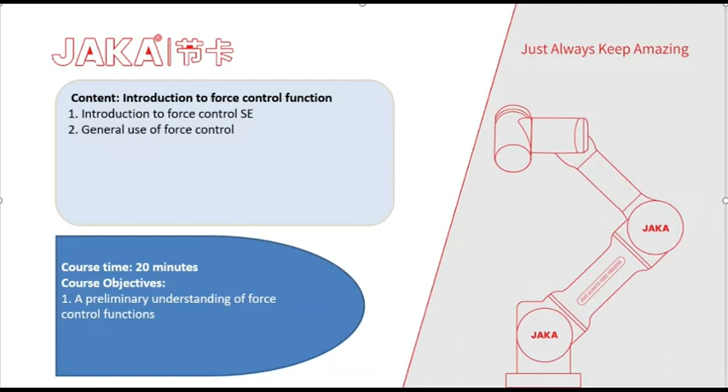This product is designed to use industrial-grade force sensors and integrates a force control algorithm with independent intellectual property rights, to improve the perception of collaborative robots and provide customers with a better human-computer interaction experience.

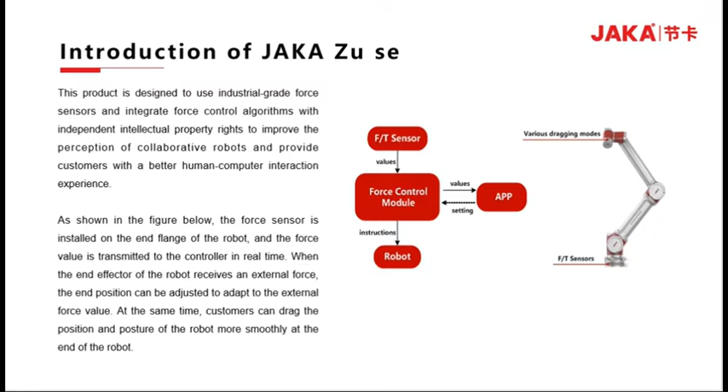As shown in the figure below, install the force sensor on the end flange of the robot and transmit the force value to the controller in real time. When the end effector of the machine receives an external force, the position of the end can be adjusted to adapt to the external force value. At the same time, the customer can drag the position and posture of the robot more compliantly at the end of the robot.

The JAKA Zu se System includes the APP, robot, control cabinet, and force sensor equipment. The force sensor at the end flange of the robot is realized through the operation of the mechanical connection software at the end sensor module in the JAKA app.

First, design the connection key between the force sensor and the end flange according to actual needs. By connecting the key or setting the tool coordinate system, ensure that the X plus direction of the sensor is consistent with the X plus direction of the robot end flange.

Then, the force sensor can be powered by the robot control or by the user's additional 24-volt DC power supply. Depending on the communication method, the sensor can be connected to the USB interface of the control cabinet for serial communication, or through the network port for TCP/IP communication.

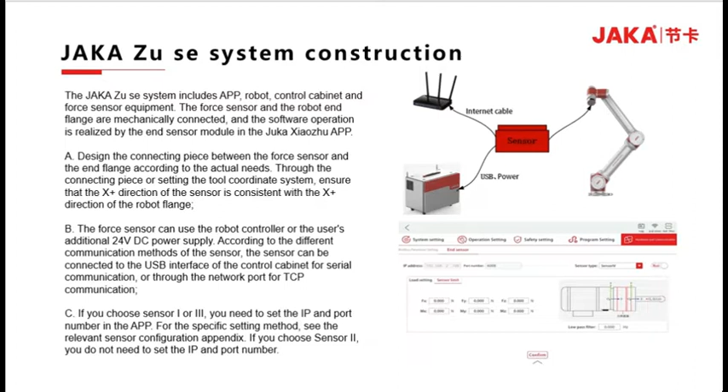If you choose sensor 1 or 3, you need to set the IP and port number in the app. For the specific setting method, enter the relevant sensor configuration appendix. If sensor 2 is selected, IP and port number settings are not required.

Force control automatic load identification function. When using a force control related function, you first need to set accurate load parameters. You can select manual input in the load setting, or you can use the automatic identification function. The process is as follows.

Set the starting position: enter the manual interface and move the robot to a suitable position, then click OK to exit. Set the end position when entering the manual interface. Only the 4th, 5th, and 6th joints are allowed to move, and the range of movement is within plus or minus 90 degrees of the initial position.

In the case of ensuring that the robot movement does not interfere, the larger the movement range, the more accurate the identification result will be. Click OK to exit the pilot operation, long press to set the starting position, return to the initial position, and long press the pilot operation to confirm that there is no interference in the identification trajectory.

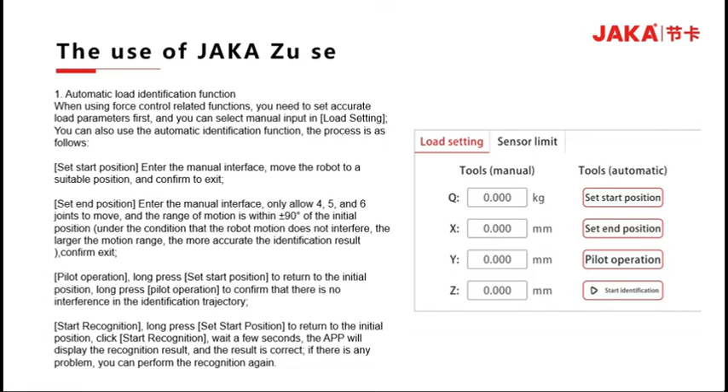To start identification, long press to set the starting position and return to the initial position. Click Start Recognition and wait a few seconds. The app will display the identification result. Confirm that the result is correct, or re-identify if needed.

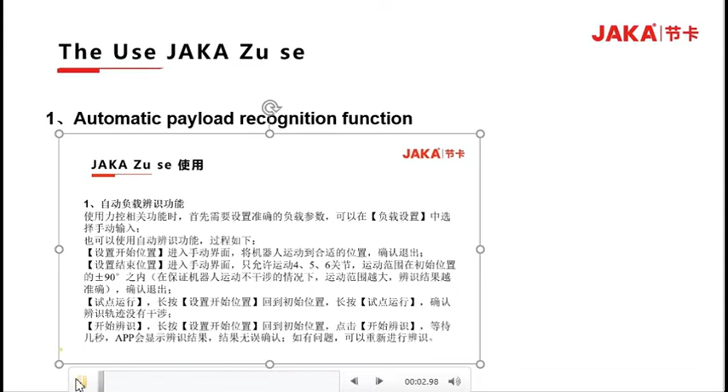Let's take a look at the video of using the automatic load identification function. Use the force sensor in the interface of setting the hardware communication and sensor. Here, use sensor 2 to set the start position.

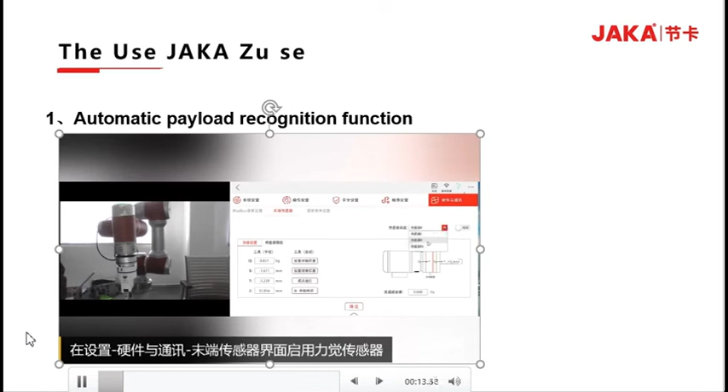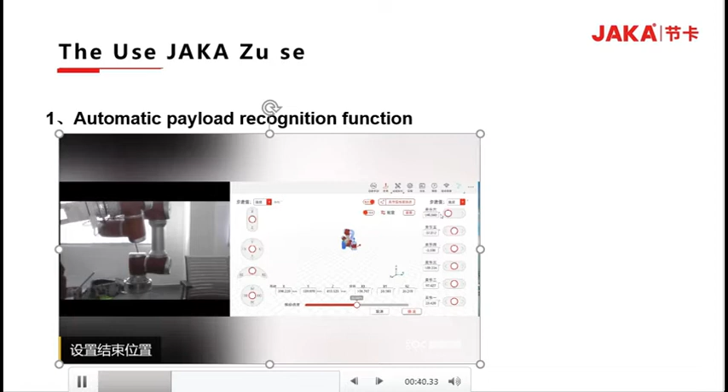At the end position, the rotation angle of joints 4, 5, and 6 must be within 90 degrees. Then long press the starting position to move the robot to the starting position. Then long press to run and check for interference, then long press to set the starting position and move the robot to the initial position.

Then you can click Start to recognize, and the robot will automatically move from the start position to the end position. After the movement is complete, the current load will be automatically identified.

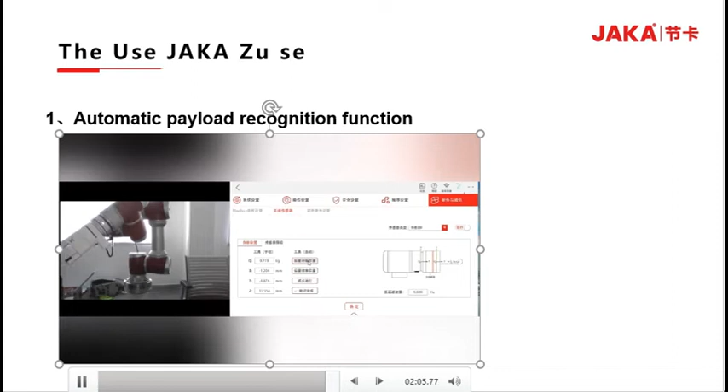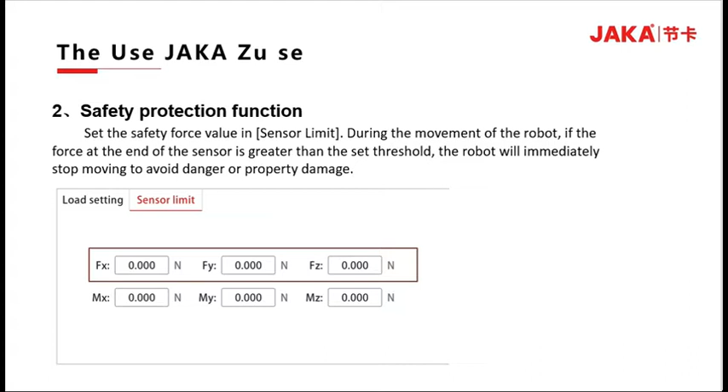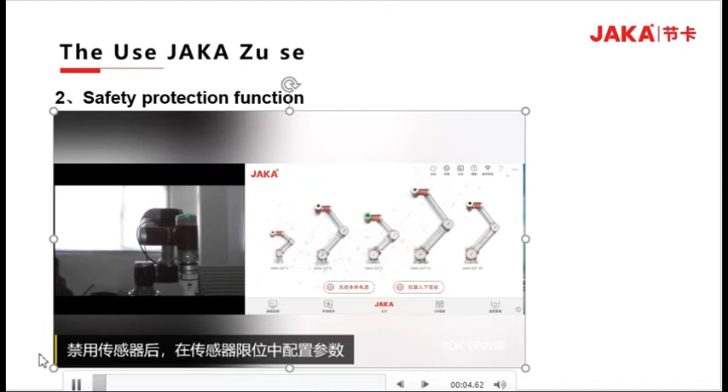Let's have a look at the safety protection function of the force control. After disabling the sensor, configure the parameters in the sensor limit. Enable the sensor and start dragging on the teaching interface. When the detected force exceeds the limit, the display shows a detected collision and automatically exits drag mode.

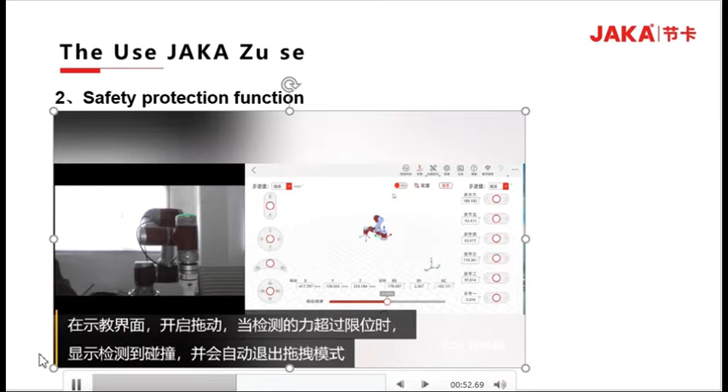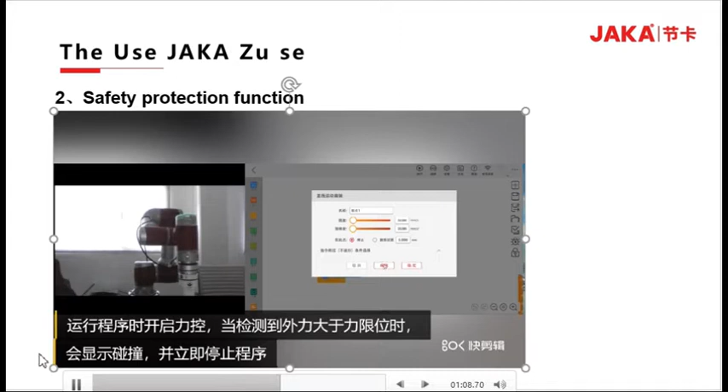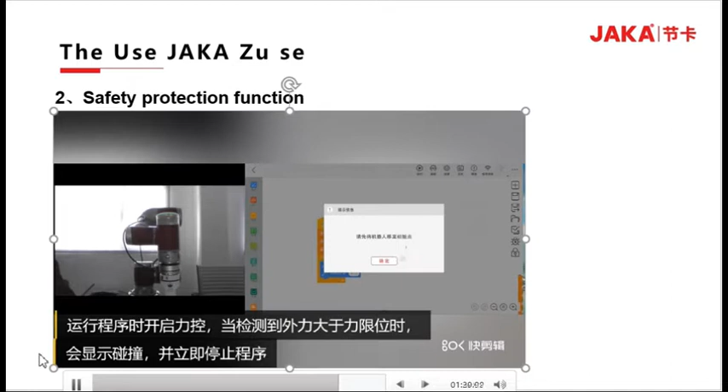Now we can try to run the program. The force control function is turned on in the program. When the external force is detected to be greater than the set limit, a collision will be displayed and the program will be stopped immediately.

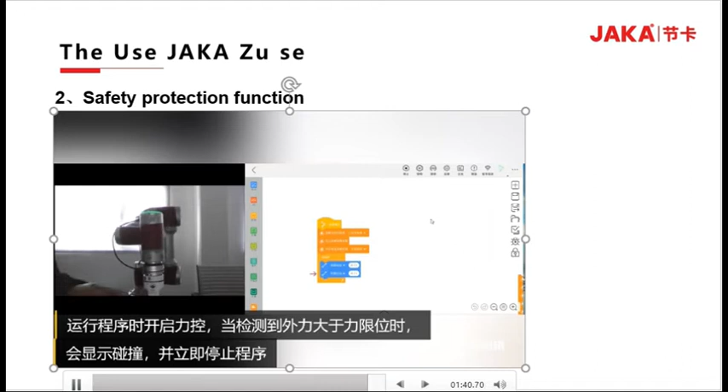The force control traction test drive function enters manual operation. First, enter the configuration interface, where Fx, Fy, Fz correspond to the displacement in the 3 directions of x, y, z, and Mx, My, Mz correspond to the rotation in the 3 directions of x, y, z.

By checking the checkbox in front of each direction, you can enable one or several directions, meaning you can drag in the enabled direction after dragging is turned on. The smaller the robot damping force is set, the lower the drag force the user needs to apply.

But the smaller the resistance is, not the better. It is recommended that the damping force be greater than 10 Newtons, the damping torque be greater than 0.2 Newton meters, and the setting value cannot be 0.

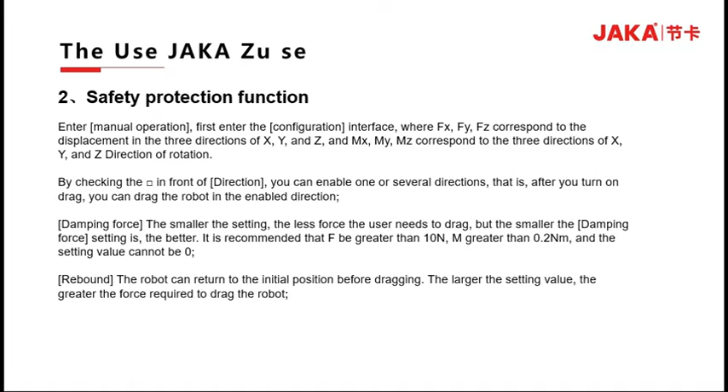For the rebound function, the robot can return to the original position before dragging. The larger the setting value, the greater the force required to drag the robot.

Check the tool coordinate system in the force control coordinate system, then drag the robot in the set tool coordinate system; check the world coordinate system, then drag the robot in the robot base coordinate system.

When the controller enters drag mode for the first time after running, you need to check the initialization to compensate for the sensor bias and load.

In the process of entering the dragging process, ensure that the end of the robot is not contacted by external forces. Otherwise, the compensation accuracy will be affected.

After configuring the parameters, click OK and then click Exit to enter the drag mode. Before entering the drag mode, the end of the robot should not be subjected to external forces, otherwise it will cause sensor compensation errors and cause danger.

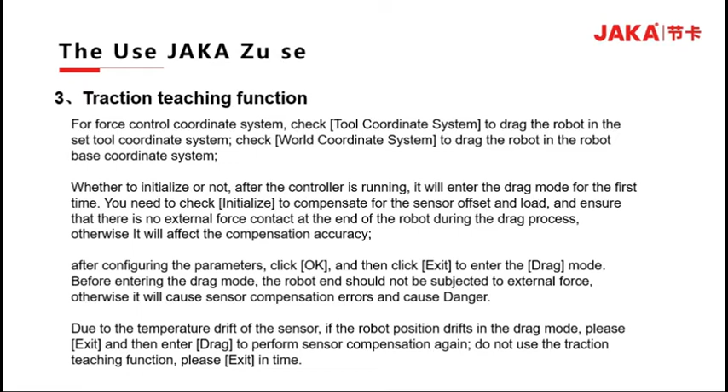Due to the temperature drift of the sensor, if the robot position drifts in drag mode, please exit and enter the drag mode again to perform sensor compensation. Do not use the traction teaching function. Please exit in time.

Now let's take a look at the video for the force control traction teaching function.

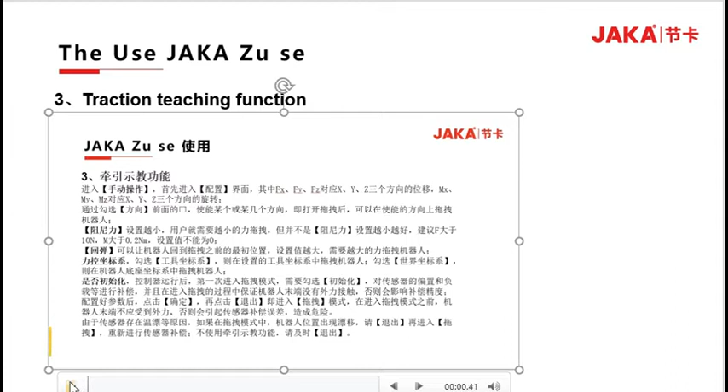First, we need to configure the force control parameters of the traction window. Here shows the X and Y direction. The damping force is 10 Newton. Select Initialize, and the current force control returns a value of 0. If you choose not to initialize, you can see the real-time value of force control in the viewing interface.

Drag the robot in the X-Y direction. Then we can observe the moving of the robot in the X and Y direction.

Then we can add a rebound into the configuration. Open the drag again to manually drag the robot. After there is no external force, the robot will return to the initial position before the push of the robot.

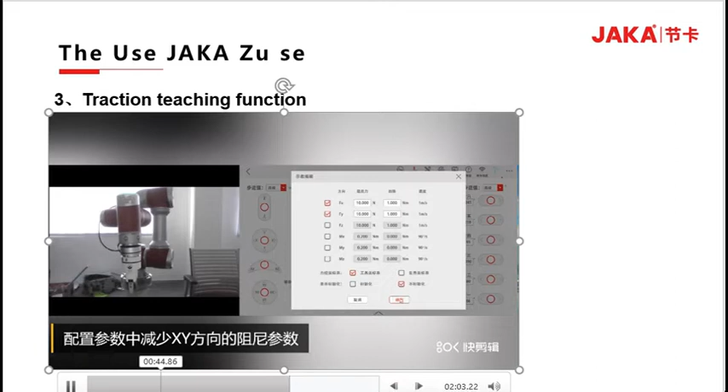Open the configuration parameters, cancel the rebound and select the parameters in all directions. Then enter drag mode on the robot and you can do position and posture drag.

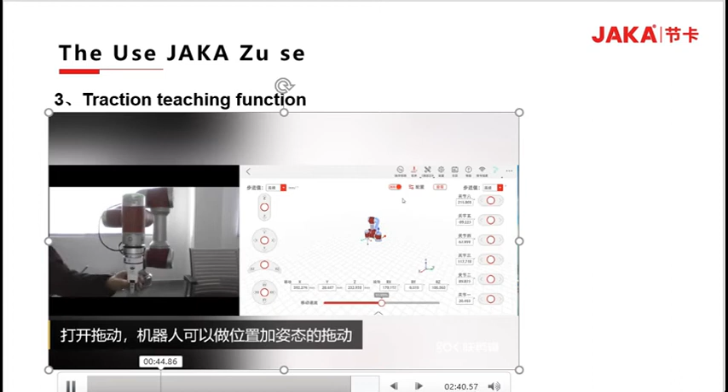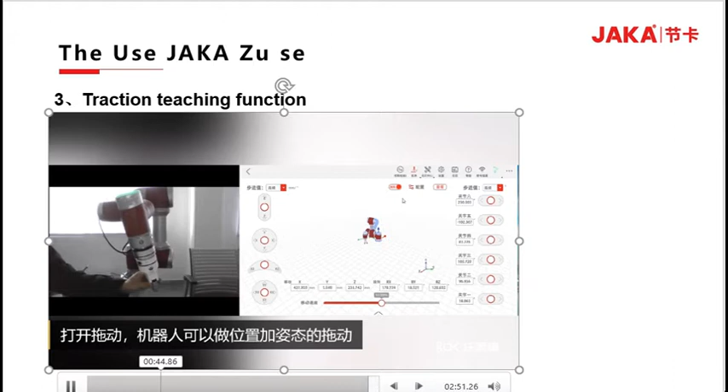The constant force mode can ensure that the contact force between the end of the robot and the external environment is within the range of the set constant force value. Constant force mode includes opening constant force compliance control setting, force control coordinate system constant force compliance parameter setting, and closing constant force compliance control.

The configuration parameters in the constant force compliance parameter setting interface are consistent with the traction teaching parameters. The user can set the constant force value according to the desired contact force value. The size of the damping force needs to match the stiffness of the external environment. Generally speaking, the greater the environment stiffness, the greater the damping force value required.

Due to the temperature drift of the sensor, it is recommended that after the robot runs for a period of time, make sure that there is no external force contact at the end of the robot, and select initialization to recompensate the sensor.

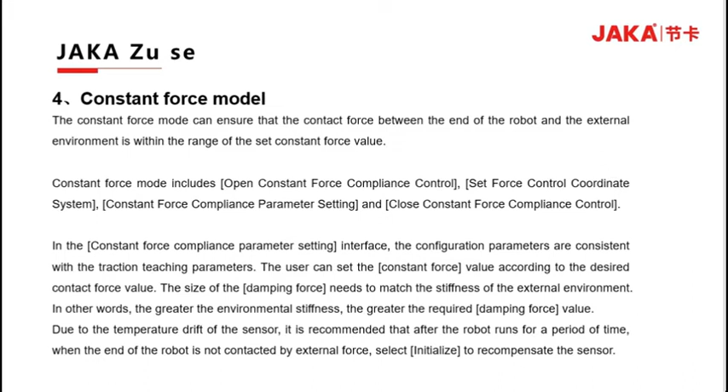Now let's look at the video about constant force mode.

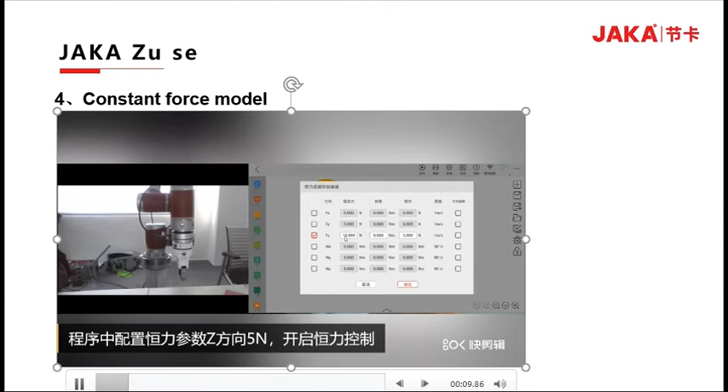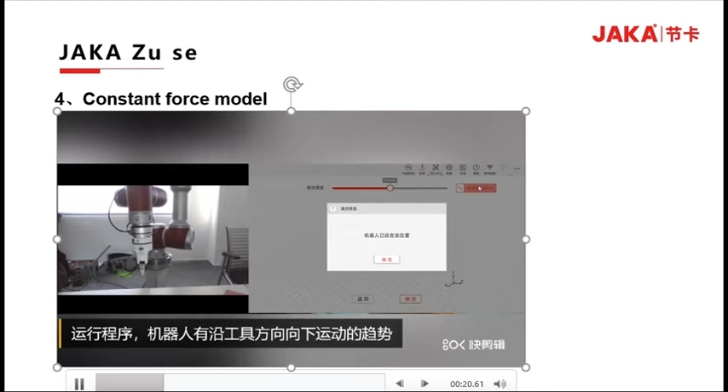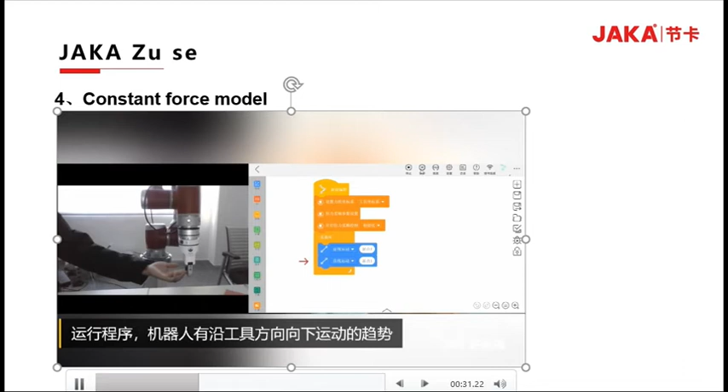Configure the constant force parameter in a program. The Z direction is 5 Newton, and turn on the constant force control. The running program has a tendency to move downward in the direction of the tool in advance. Check the force in the Z direction on the manual operation interface. It can be seen that the force in the Z direction is about 5 Newton.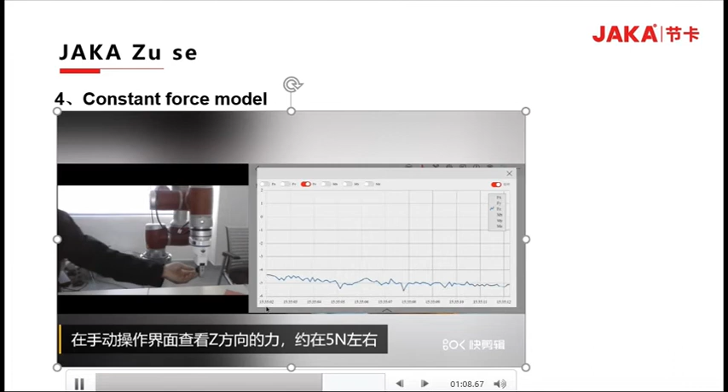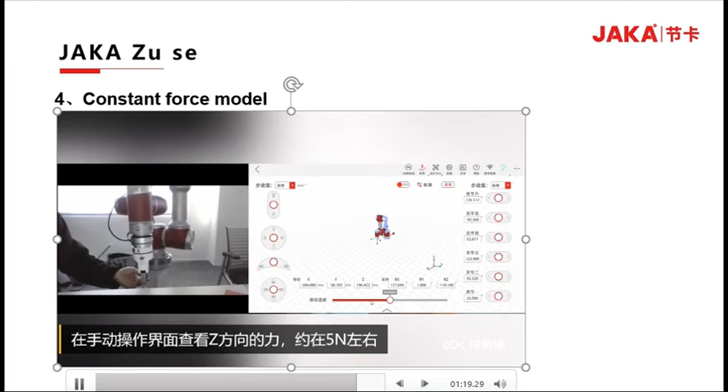The fifth, force control speed mode function. In speed mode, when the end of the robot force is greater than the control force setting, the robot will decelerate until the sensor detection value is less than the control force setting value.

Speed mode includes opening speed compliance control, speed compliance parameter setting, compliance control force, and closing compliance speed control. Configure the speed ladder on the speed compliance parameter setting interface and select the size of the control force on the compliance control force interface.

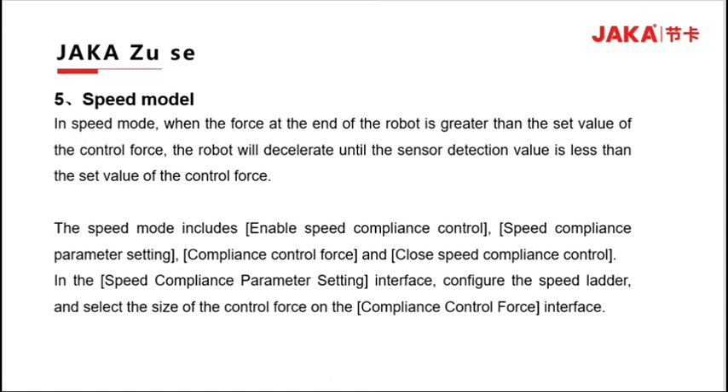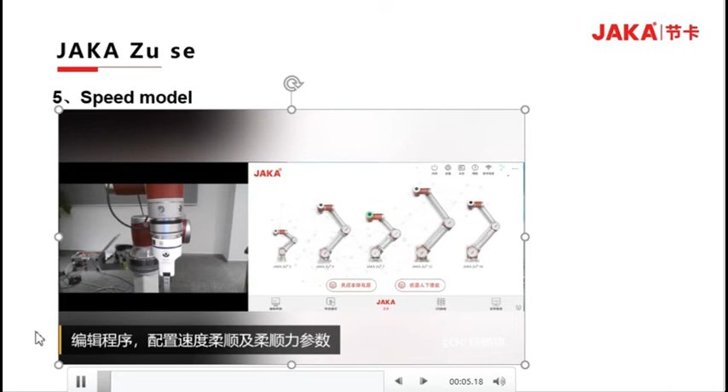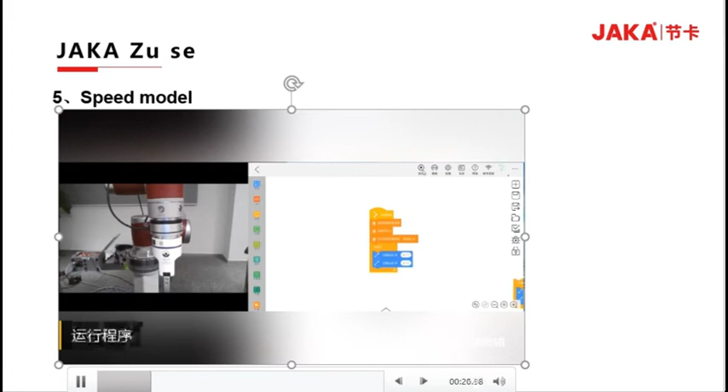Now let's have a look at the speed mode force. In the program, you can set the speed compliance and the compliance force parameters. Then you can run the program.

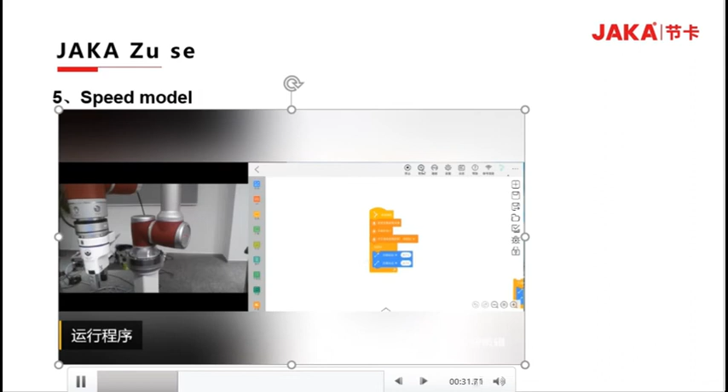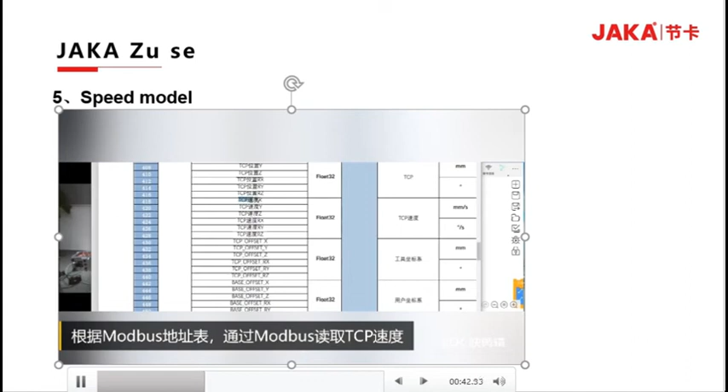Now we are going to monitor the speed using the Modbus TCP. We are watching the address table for Modbus, and we are setting the address to monitor the speed of the TCP.

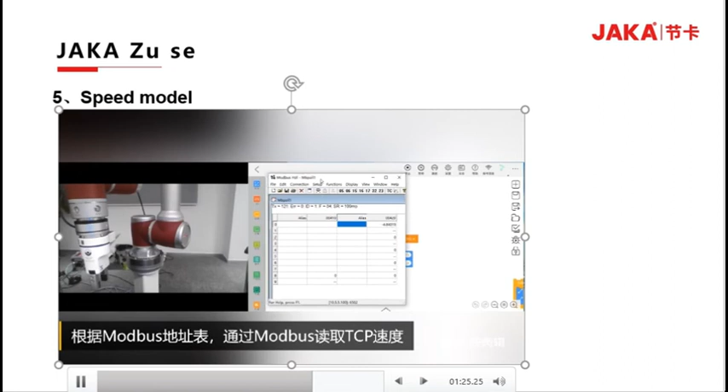We can see that the speed of the TCP in a constant force is around 30. Now, when we apply a force on a force sensor, we can see that the speed is reduced.

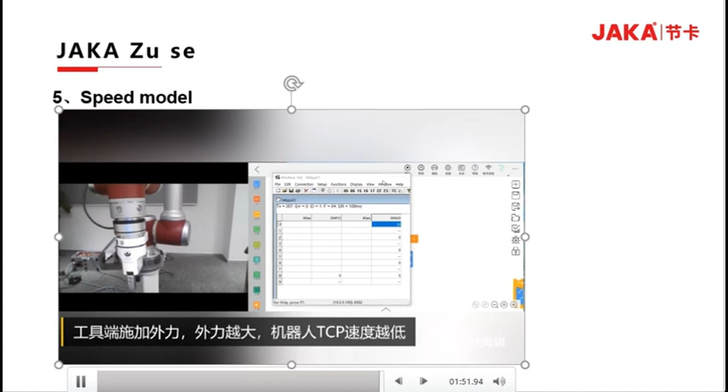The sixth part, motion termination conditions. In the motion termination condition setting interface, check the direction to be monitored to set the upper limit or the lower limit. When the contact force value is less than the lower limit or greater than the upper limit, the motion termination condition is triggered. The motion termination condition monitors the next motion instruction next to it.

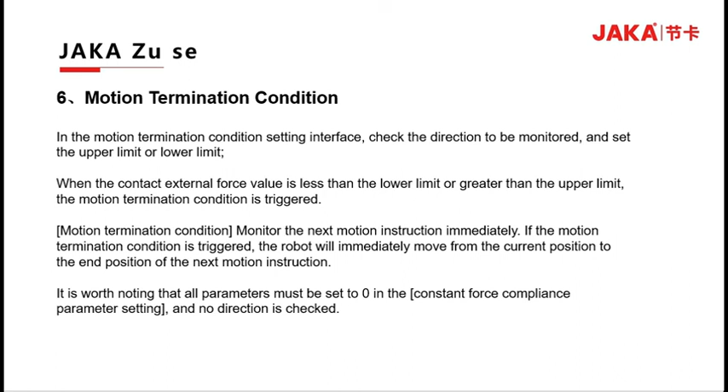If the motion termination condition is triggered, the robot will immediately move from the current position to the end position of the next motion instruction. It is worth noting that all the parameters must be set to 0 in the constant force compliance parameter setting, and no direction must be checked. Now, let's take a look at the video using force control motion termination condition.

Configure the motion termination condition parameters. Here, we choose the lower limit -5 Newton. The upper limit is 5 Newton. And then we can run the program.

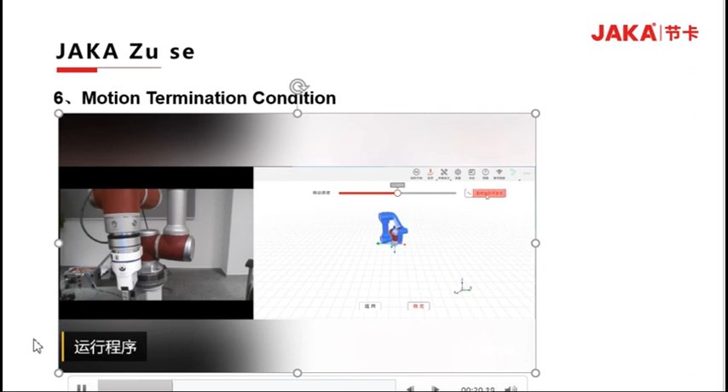When the external force does not exceed the motion termination condition, the mechanical arm moves normally.

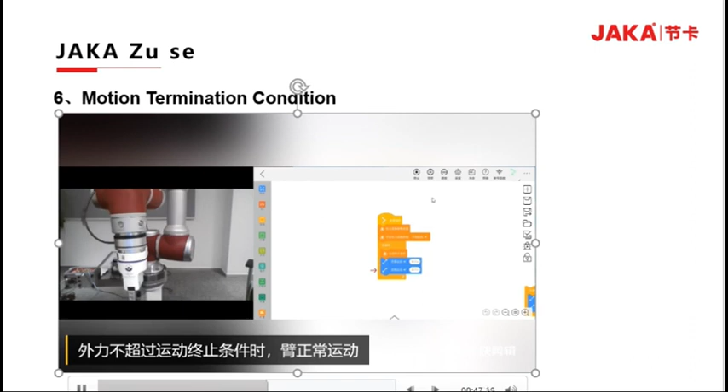When the external force received by the TCP is greater than the motion termination condition, the current motion instruction is terminated and the next motion instruction is executed.